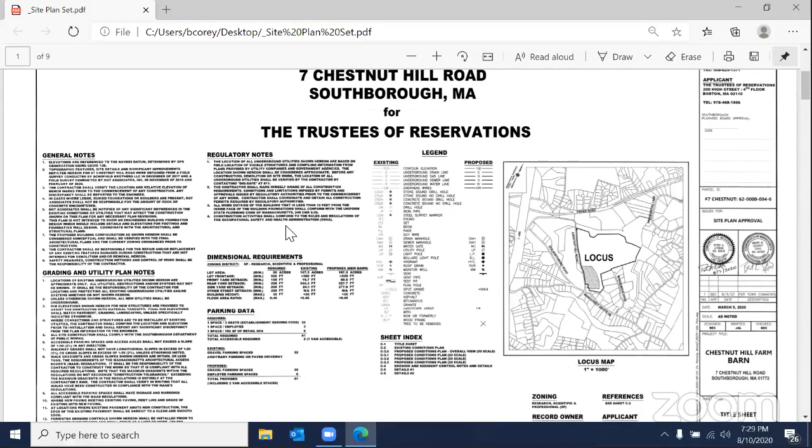All right, scrolling down through the existing conditions. So here was the overall site, move those off to the side. So you can see that we have the limit of work around the north parking area, we've got the limit of work around the parking lot closest to the barn. We also circled the proposed sewage disposal system coming out into this driveway area.

There is a limit of work associated with these three parallel parking spaces, but it's not really part of the earth disturbance because all we're doing is painting some white lines on existing pavement, so that's not included in the area of disturbance. Otherwise, the rest of the limit of work is included. Scroll down.

So this is the parking lot that's closest to the proposed barn. We accentuated a little bit of what's going on with the Chestnut Hill roadway coming into the gravel parking lot. Essentially, we just want to create a small berm there to prevent stormwater runoff from coming across the parking lot.

We also moved a sign that was discussed in the review letter. The sign indicating the handicapped aisle space was right in the middle of the aisle. It happens to be 9.5 feet wide, but we still moved it back. So that sign, the accessible aisle sign, has been moved back.

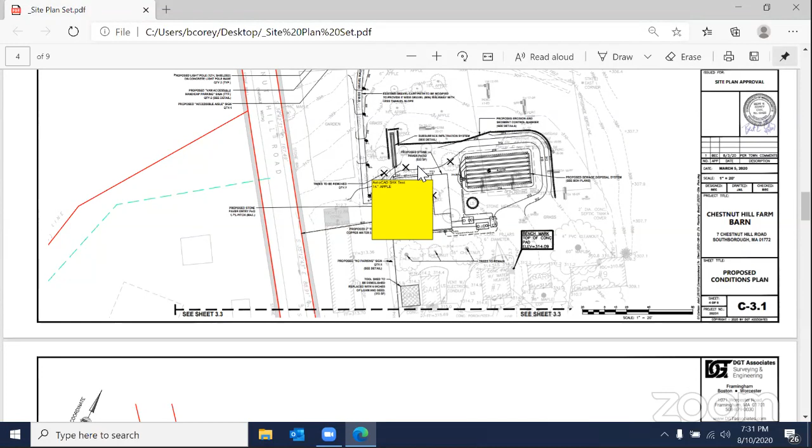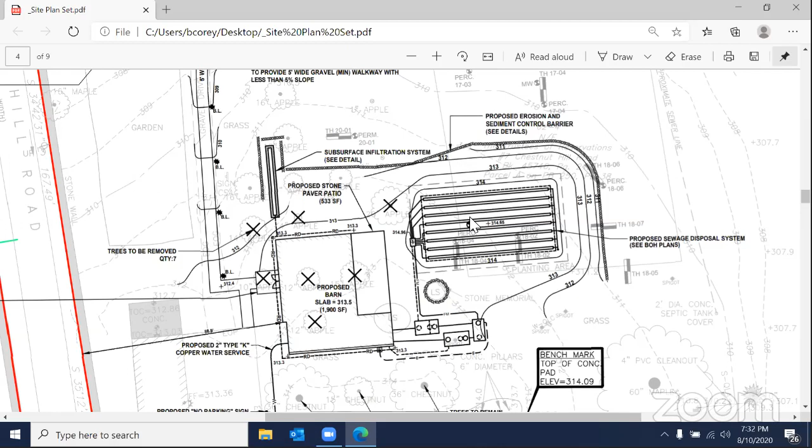We also added to the plans, as came up in discussion at the last hearing, to show which trees were being removed. Let me zoom in a little bit. As part of this, they have an existing apple orchard there today. With the proposed construction of the barn as well as the soil absorption system, we're proposing to remove 7 trees. This is the largest of the apples - a 20-inch apple, a 14-inch, a 12-inch, a 15-inch, another 12-inch, and a 10-inch, all apple trees.

There's some large chestnuts along this side that are to remain, and they're to essentially be protected.

We also added a no parking sign in response to the fire department's review letter.

Moving on to the next one, on the north parking area, we're really not going to do too much with any of the pavement up in this area - just trying to add additional gravel. You can see the existing edge of gravel doesn't really line up too well with where our proposed parking is. We could try to shift the parking back over to where it was, however it doesn't give us room for this wet swale we're proposing for stormwater management. So by pulling the driveway off of the wall a little bit, we had to shift the driveway over, again just to line up with the dimensional standards.

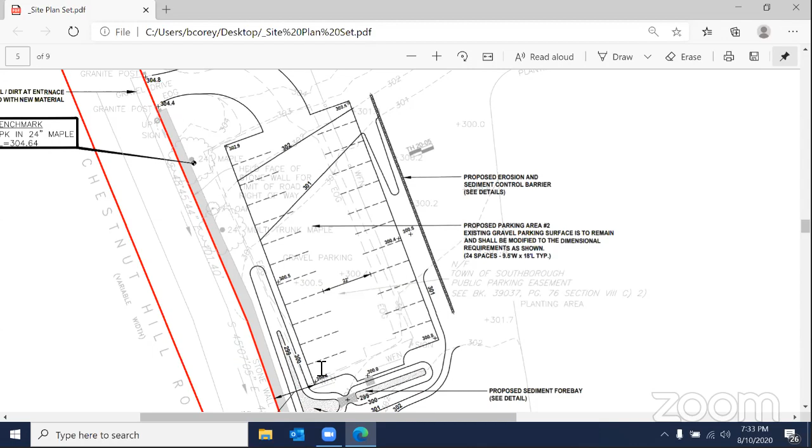I also added this contour here just so it's easier to understand what's going on with the grading in here. It's a simple 301 that carries through this parking lot area, and then there's a low spot, so in case this water quality swale ever overflows, it would pond up as it does today, and then it would continue out in this general direction as it does today. I just wanted to highlight that.

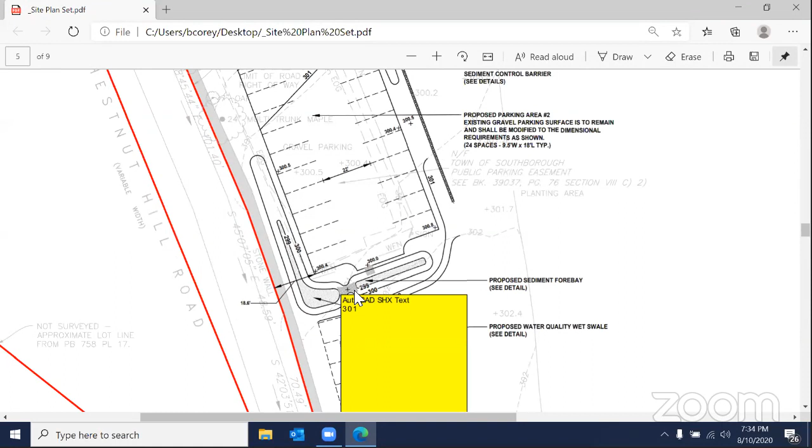And I also increased the size of the sediment forebay, doubled it in size. I just saw an error in the calculation, so I made the adjustment on that.

Going forward, we also added a Chestnut Hill address sign. Essentially, the fire department wanted to have some kind of address sign out in the front, so that'll be a sign that says number 7 and number 9, Chestnut Hill.

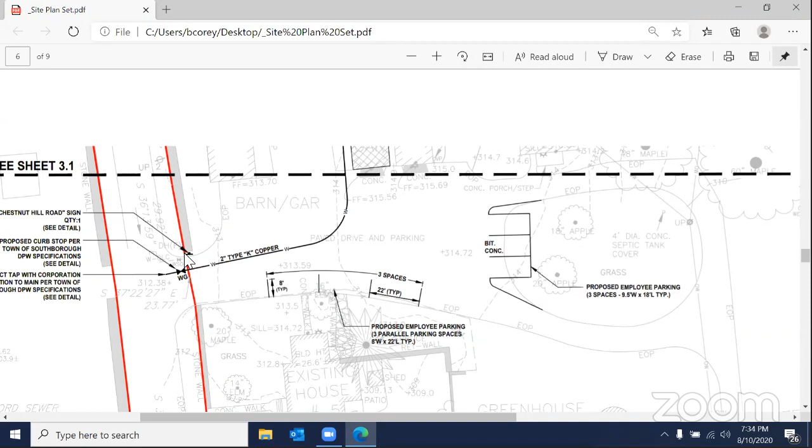And going on here, there was some indication of alternate parking that was removed from the plan. Those are essentially the changes to the plans.

Very good. Any other information that you wanted to share, or should I open it up to the board and the public?

Well, we also updated, as part of the review letter from Fuss and O'Neill, I think we compiled quite a bit of data, exhibit plans, as well as updating the stormwater report too. Haven't seen their response to our response, but there was quite a bit of information that was forwarded on to everybody. I just want to point out that...

First question I had, primarily because it's a pretty important one - did you work out the lid threshold with Fuss and O'Neill? I'm assuming the answer is that a lid is not required.

I can't answer that because I haven't seen their response, or Amy's response back to our response. We did communicate in the very beginning, then I was on vacation, but I tried her a couple of times and did not get her. We did send over the CAD file so she could go in and verify everything. So I'd actually have to read her response back, and what we sent over. I haven't seen that yet, so I can't say anything about it.

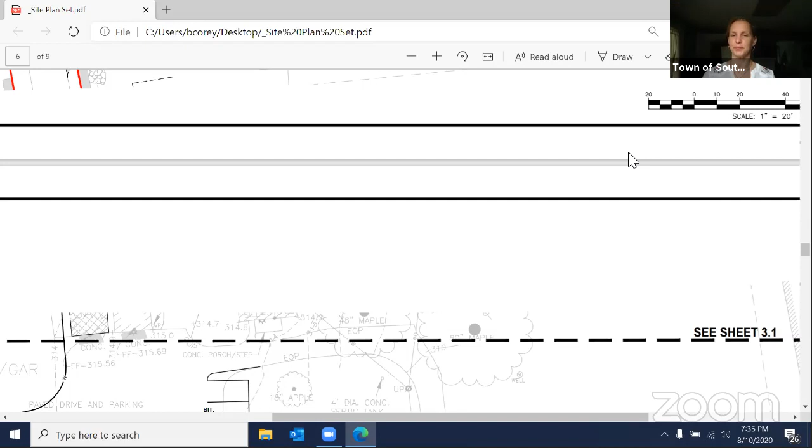Okay, so that'll be to be determined. If I can open the comments before the end of the meeting, maybe I can answer that as well.

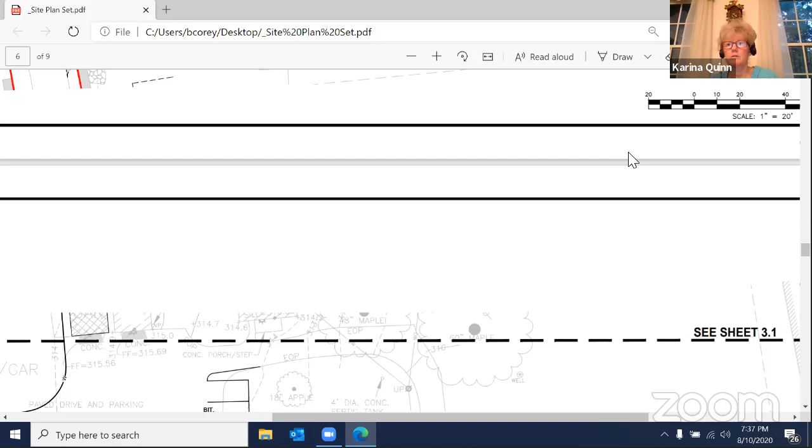Okay, and then also to point out that I believe you submitted a letter from Conservation indicating that the project was approved by the Conservation Commission, indicating that it falls within compliance of the conservation restriction. Yes, that's correct. Bob, okay.

There was a question last meeting on that. Okay. Karina, did you want to go over the discussion relative to handicap? Yes. So there are a couple of things I just wanted to bring up before it goes to the board for questions and to the public. Just give me a second here.

All right, so we need to, once we look at the updated review comments from Fuss and O'Neill, the follow-up review comments, we'll see what they say in regards to the requirement or the need for a special permit for lower impact development. Then, like I just mentioned, the barn is, and the work under this project appears to be compliant with the conservation restriction from conservation.

I believe you have your stormwater management permit back from conservation on July 9th. Yes, that's correct. Okay, I'm just going through my papers here. Hard not being at a desk.

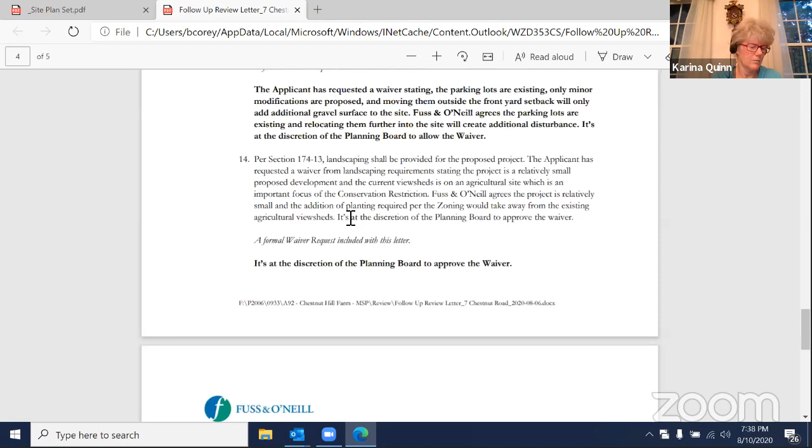Okay. I received some questions regarding the ADA compliance. They were from Bonnie Faniff, who's a resident in Southborough. And she is on the ADA committee, but she wasn't speaking to me from the committee. She was speaking to me as a resident, and she was going to come on this evening as well, but I don't know if her information was working. Her computer was down earlier today, so it had nothing to do with this meeting.

But she had questions. Will there be use of the town parking area for events used at the barn? And that question is because the conservation restriction indicates that 10 of those spaces in the trailhead parking area are explicitly to be used for trailhead parking. And it appears that you may have included those 10 spaces in your parking calculation for the barn. So that was the first question.

Question 2, wheelchairs, walking aids, or anyone that has difficulty with walking should be provided with an accessible route, surface firm and stable, grassy area closely cut to the ground level. No one can enjoy an event if access becomes slippery or muddy. The access appears to be long. Who will maintain it? And is there any consideration on a drop-off area at the front of the building to address the overflow ADA parking needs if needed?

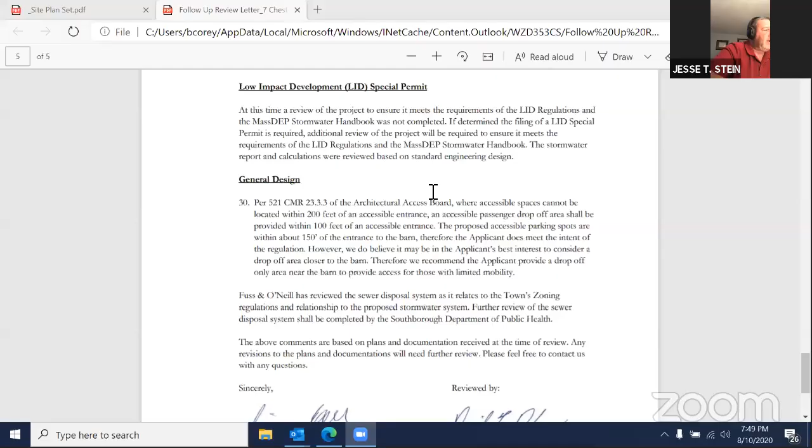Are the parking lots contiguous, or are they separated in some fashion? Well, we're proposing some overflow parking, beyond the gravel parking lots, for some events we would park in the field between the two. But there's an existing farm road that connects those two lots.

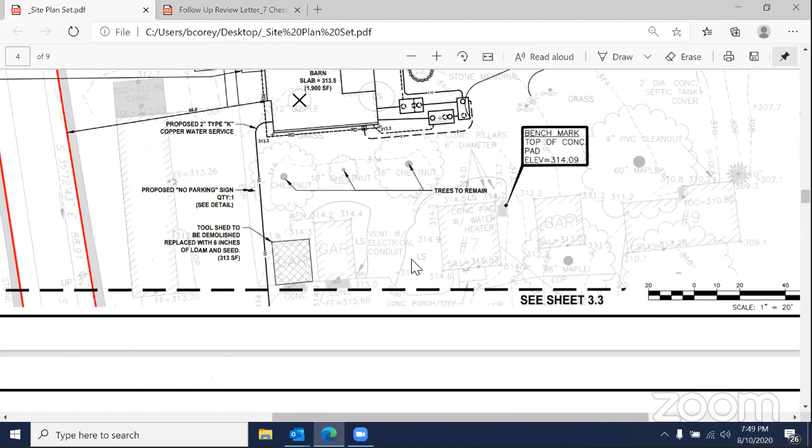Can everyone see the screen? Yeah, I can see it.

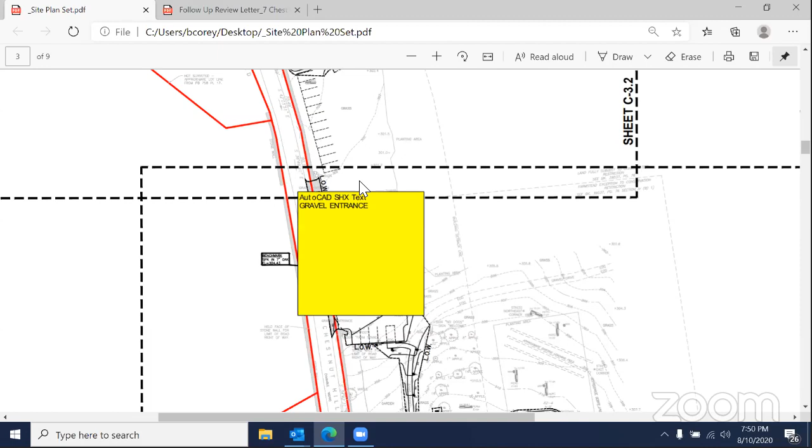This is the smaller of the 2 gravel parking lots, north of the building. Cars come in and also go out the same entrance here. Then the northerly parking lot, this is also an in and an out. There's really no linking this parking area to this parking area. For the overflow grass parking, that would be through this entrance, and that's also an in and an out.

I think it's fair to voice the concern that it's a very narrow road, and there's going to be potential traffic, in my opinion, based on the current plan.

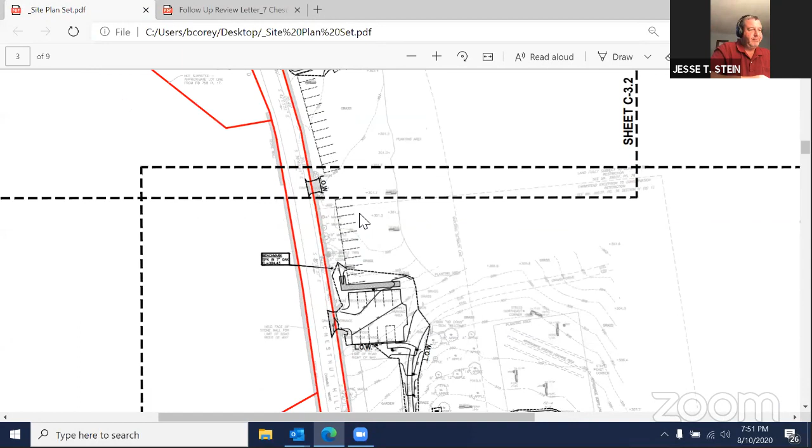Do you have any questions about that or comments? Well, we can certainly look at whether circulation would help with that. We were trying to work within the existing footprint as much as we could to minimize site disturbance.

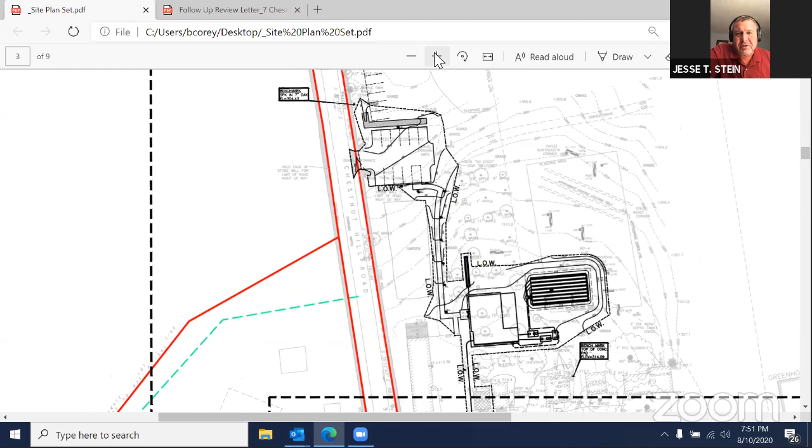So if we could talk about the photometrics for a second. Sure. Actually, on this diagram you have up now on the screen, can you point to exactly where the proposed light poles will be? Can you see my cursor? Yes, I can. Right here and right here.

I got to learn how to shut those text boxes off, they drive me crazy. If you could do it again, please. Let me see if I can zoom in a little bit more for you. Right in this area here is one of the light poles and another light pole over here.

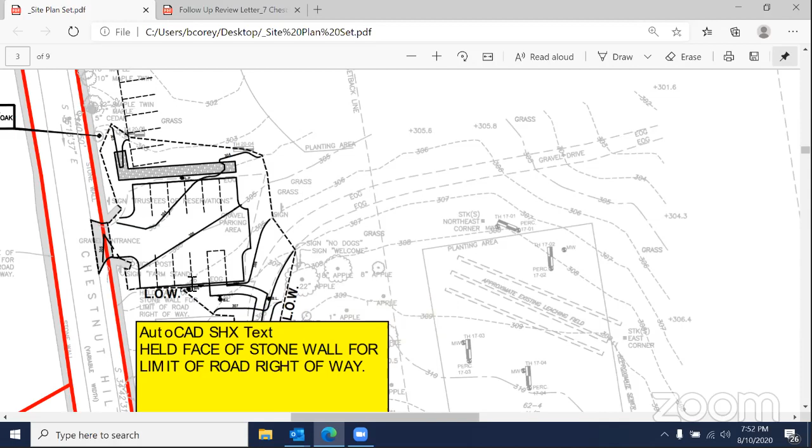Are there any bollards? Are there any existing light poles on the site? There's no existing light poles. We did create an existing light fixture plan. I can share that with you too, if you'd like to see where the existing lights are.

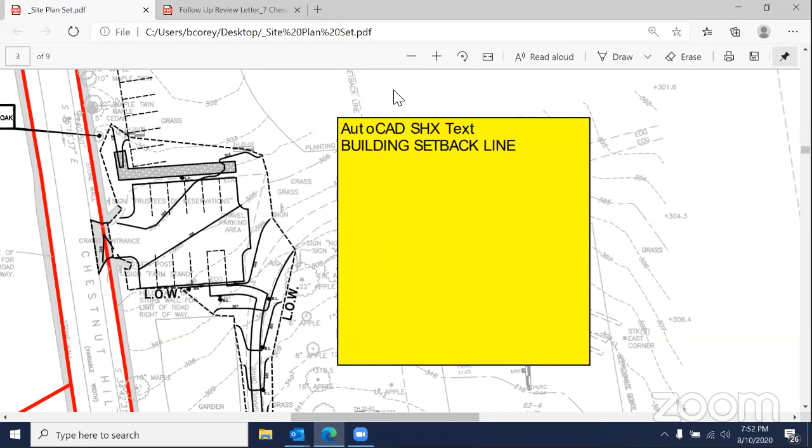Would they be in place or taken down? There are existing light fixtures that are on the buildings themselves. Oh, okay, so in other words, these two light poles will be the sum total of the new photometrics, not in addition to existing photometrics. That's correct.

There's also some small bollards that come up this walkway too, and those are also a part of the photometric plan.

So I'm looking at the photometric plan. If somebody could just explain it to me, there's like blue numbers, green numbers. Maybe just take us through the photometrics, if that's okay. Yeah, I didn't really work on the photometrics, but I'll be glad to take a look at it with you.

This is, oh, that's not the one. Is this the drawing you're looking at? It is, yes, exactly. Great. So these are the two light poles I was pointing out in that parking area, and these are the bollards that go up that walkway.

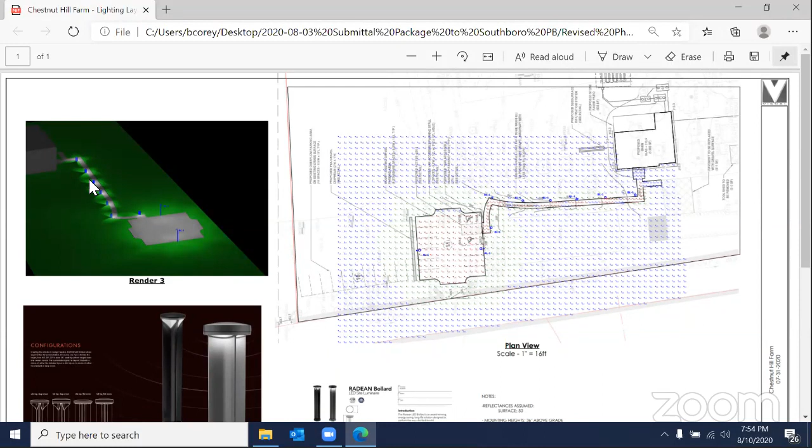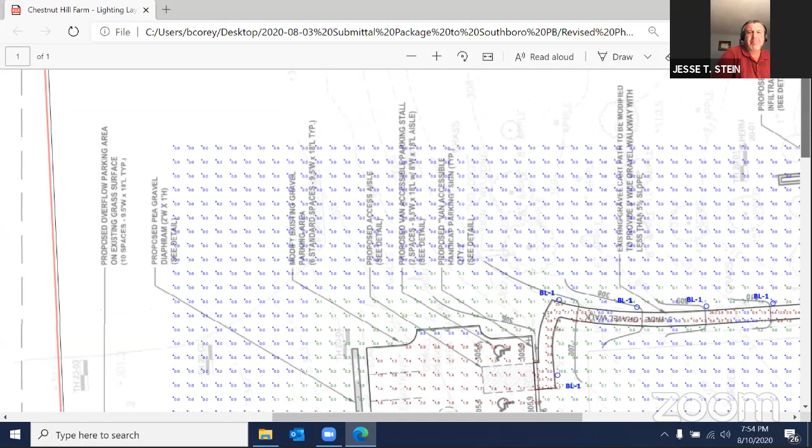Now, how big are those, what did you call them? Bollards. B-O-L-L-A-R-D. Oh, okay. Usually they're like 3 feet high. You see those out front of a lot of commercial buildings, more for pedestrian lighting so that they can walk in through the entrance.

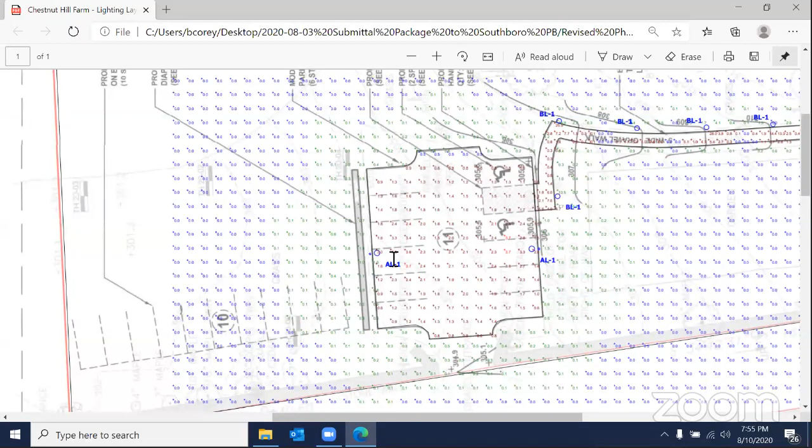So when they do the photometric plans, they know what the light fixtures are, they know the light output from the fixtures, and they generate all of these numbers as foot candles. This is the light being discharged from the actual light fixture. What we try to do is get it as close to 0 at the property line, so there's virtually no light trespass over the property line. Up close to the light fixture, you'll start to see, what is that, 3.5 or 3.6 foot candles.

As you get closer to the property line, now we're back at zeros. I guess the blue ones represent the zeros. The green ones are the 0.1.

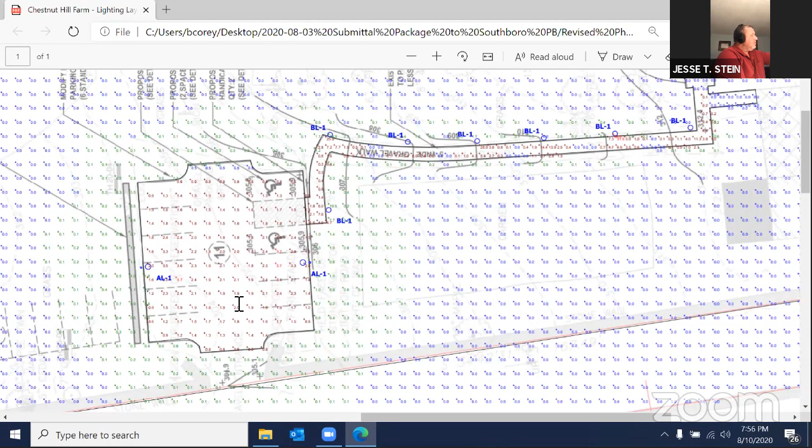Yeah, that's the actual, that's where it's brightest. This is where the red's going to be, obviously underneath the light pole and underneath the light fixture.

As you start to go away from those light fixtures, though, this starts to dim down, and the whole intent is to try to get this down as close to 0 as possible at the property line.

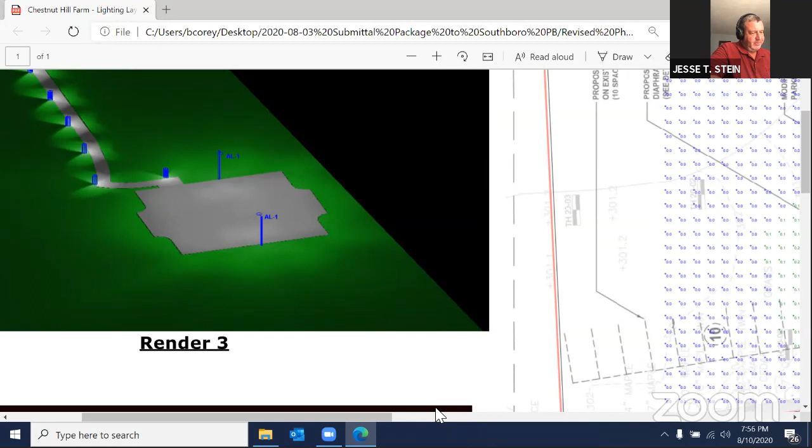So my last question was about the LID. I'm just trying to follow the communication. There was DGT Associates submitted the waiver request.

Fuss and O'Neill said it applies if it's an acre, and you guys said well, the site's less than an acre on August 3rd. So Karina, has Fuss and O'Neill just not had a chance to respond to this August 3rd letter from DGT?

No, I was just looking through that myself. What happened is the original question was Fuss and O'Neill had determined slightly more than an acre. DGT had determined that they were just about under an acre.

Yep, I'm looking at the number here. We're actually, after redoing everything, we're a couple hundred feet under an acre, so we're just under the acre.

Right, so in the interim between the two meetings, DGT, Bert Corey submitted a plan to me and to Fuss and O'Neill with a limit of disturbance and also CAD drawings so that Fuss and O'Neill could look in detail with measurements right in the CAD drawing, along with truck turning radiuses. And as I'm looking at the follow-up letter from Fuss and O'Neill, it appears that it's still in there saying about a waiver.

At this time, a review of the project to ensure it meets the requirements of the LID regulation of Mass DEP have not completed. Determine if the filing of a LID special permit is required. Additional review of the project required.

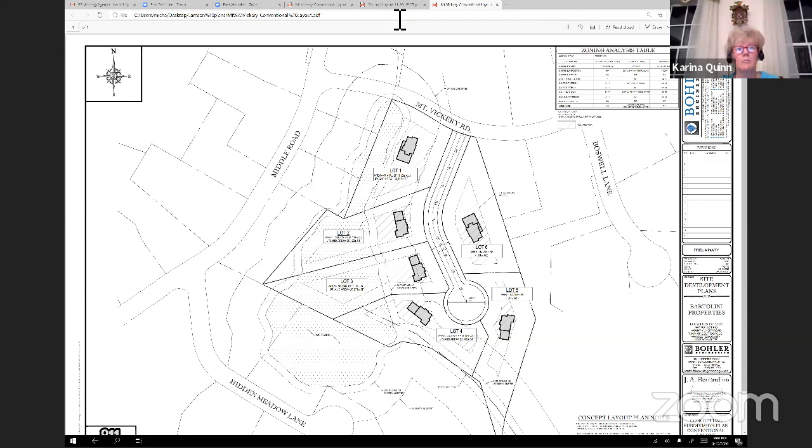The north arrow is going this way, but the road's here. So if you look at the orientation of it - sorry, I'm having an issue. If you go to the flexible layout, yeah it's the same layout. It's the same view, but you rotated the whole drawing 45 or 90 degrees to the right, so it makes it hard to see.

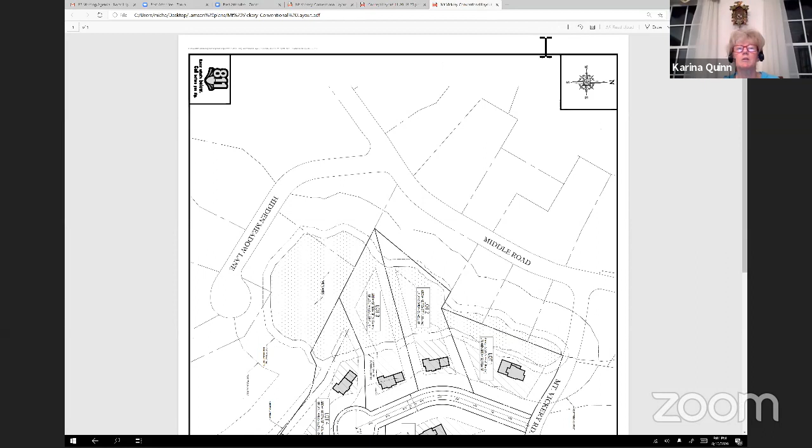Right, so to compare everything, the scale is different also, and it's rotated. I think the north is still the same. Here, I can rotate, hold on one sec. All I'm saying is that between the two plans, it really helps if you can compare apples to apples, same scale, and say Mount Vickery would run across, or Middle Road is across the top. You know what I mean?

Sure, so we can have them amend that. Because if you're looking at it quickly, you have to kind of rotate the plan, especially when you're dealing with PDFs. Gotcha, it just makes it more difficult to compare the two layouts. If they're both oriented the same, you can say, oh look, lot one is a little bit smaller and the flex frontage is a little less, you know.

Okay, I mean I believe the north arrow is the same, it's just the orientation of the plan. Oh, I'm not saying the north arrow is different, I'm saying you just didn't rotate it the same. Correct. Okay, beat that dead horse.

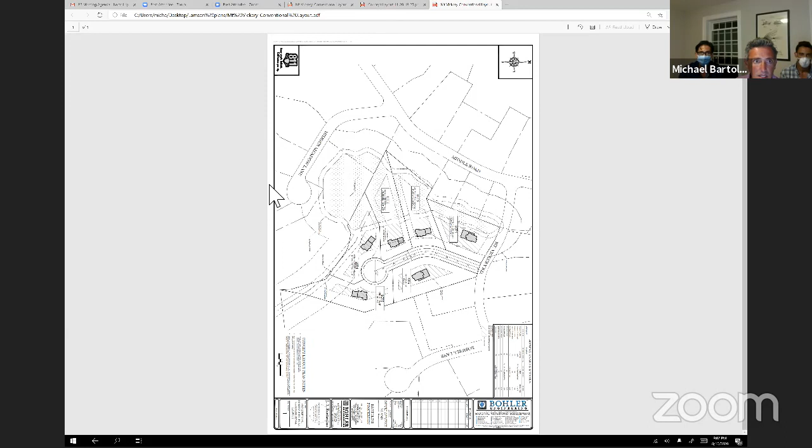But yeah, like I said, we think that shrinking the property and adding more open space does add a great benefit to the neighborhood and the surrounding neighbors. So do you know what percentage open space that is? I believe in the conventional it's 10%, and I believe the flex is 25%. Okay, thank you.

Okay, we'll open it up to the board. Mr. Mills? Yeah, I had a question. The abutters to the proposed new six houses or properties, are there already homes abutting all those lots?

There are some houses here. There is a house here. Those homes, like I showed you before, have been up against a logging facility for the past 20, 30 years. So I think in the back here, one of the neighbors is right there, and he's been staring at logs and chainsaws forever. So yeah, there are homes surrounding it.

I believe there's a home over here off to the left of this pile. There is an intermittent brook in the back here. Once you cross that intermittent brook, there are some homes on Hidden Meadow. And then further off in the distance, you can kind of see some houses on Middle.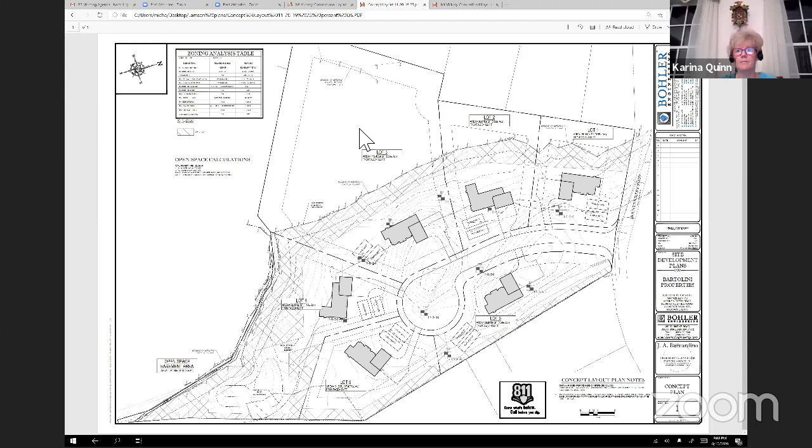I can go if we... Yeah, go ahead, Marty. Yeah, so Michael and team, nice to meet you. I wanted to ask, so as I looked at 174-13.2, there are very clearly stated objectives for flexible development. And I heard you talk about less sprawl, but there are 9 clear objectives, and I'd love for you to just talk through those.

I can actually share my screen if you stop sharing. Yeah, hold on.

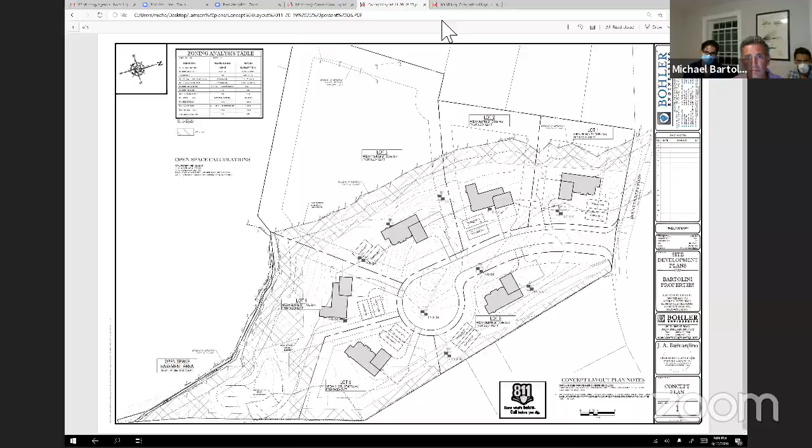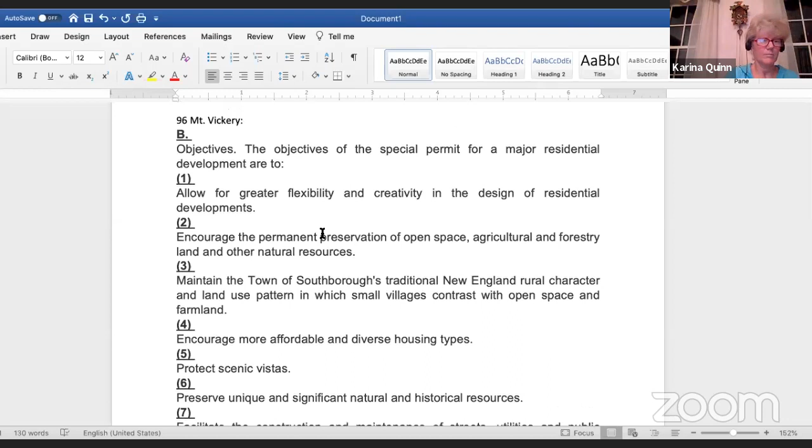So I just copied it and pasted it from town code onto my Word document, but I would love to understand, so there's kind of 9 of these things, and I want to make sure the objectives are clear from you as developers, that we try and achieve what the goal of the flexible arrangement is. I don't want to read them through, but I think if you can just read through and comment as you see, just to address each of the 9 points.

Sure, I mean for the first one, it does create quite a bit of flexibility, especially in design.

It allows for a better looking neighborhood. It allows for better placement of utilities. It just gives you a lot more creativity within the project.

The second one, instead of 10% with the conventional, you're at 25% open space, 10% being undisturbed natural.

The third one, instead of the sprawl, I don't know if you've looked at our Leeds Way project compared to other projects. It allows for the flexibility of the houses to be closer to the neighborhood, to the street. Allows the houses to be closer together. Gives it more of a neighborhood feel. Like I live on McNeil Drive, the houses are much closer together. It gives more of a chance to do that.

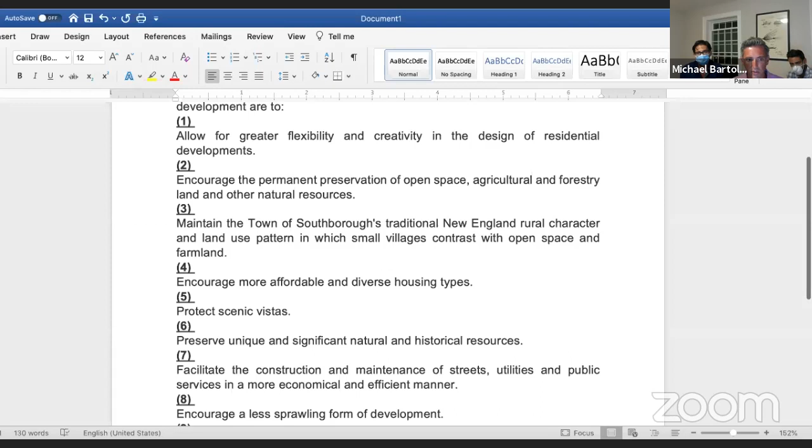Gives a more diverse housing, the affordability. The definition of affordability is different. Are you thinking of having these all at just market pricing? Are you looking to bring in any sort of diverse or affordable housing within these 6 sites?

I'm not looking to do that now. Okay.

The scenic vistas, I will say the wetland area is actually very attractive. It's more like a meadowish type area, so that would be protected. I don't know if there are any unique or significant natural historic resources there, so I don't know about that.

It's a drastically shorter road, and I would say that would help with the maintenance of streets, utilities, and public services. Again, shrinking the project just makes less sprawl. And I don't think we would be putting any passive or recreational facilities there.

Just for clarity on your determination of open space, that doesn't include any of the wetlands, correct? That would be upland area. Sorry, what did you say, a blended area? Upland. Oh, upland.

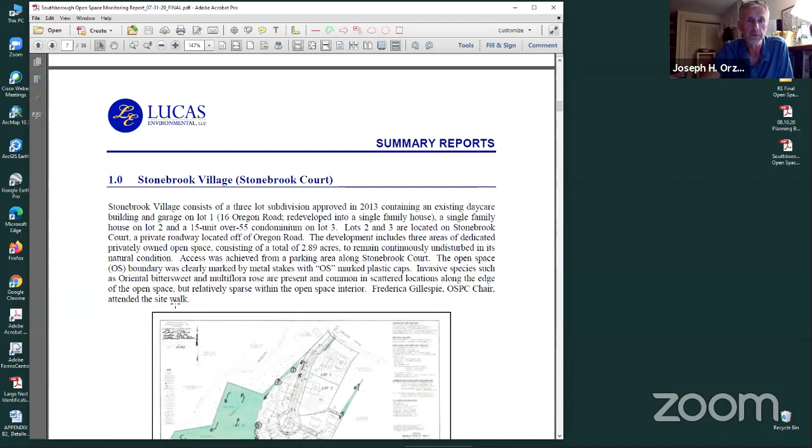As I mentioned, the first site was Stonebrook Village, located at Stonebrook Court. This is a new subdivision. A couple of things were memorable about this site visit. Freddie accompanied me on the site walk and was able to provide a wealth of knowledge. This particular site was not in the database, so it was good having Freddie there.

The boundaries of the site were very well marked. Granted, it was a very recent development, but the use of the iron rods with the caps, spaced every 20 or 30 feet, made it very easy to know exactly where you were in relation to the open space, in contrast to some of the other sites, which we'll get to.

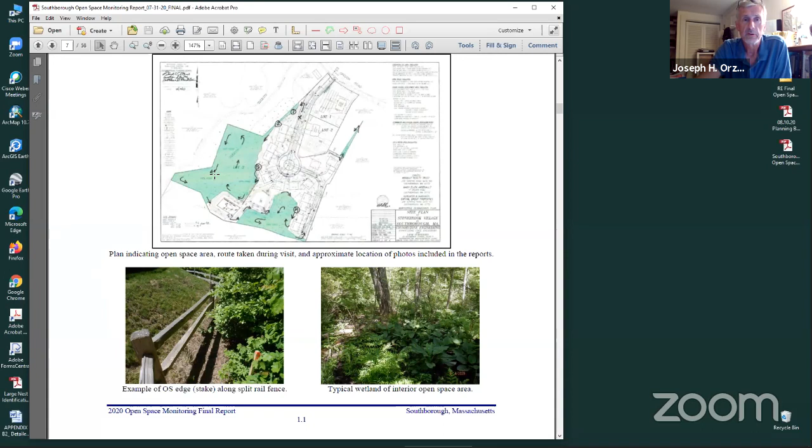In general, the open space is in good shape. There is not a lot of invasive species. There is some invasive species in this section - let me see if I can show it - right along here behind the houses where the numbers 1 and 2, the photos are.

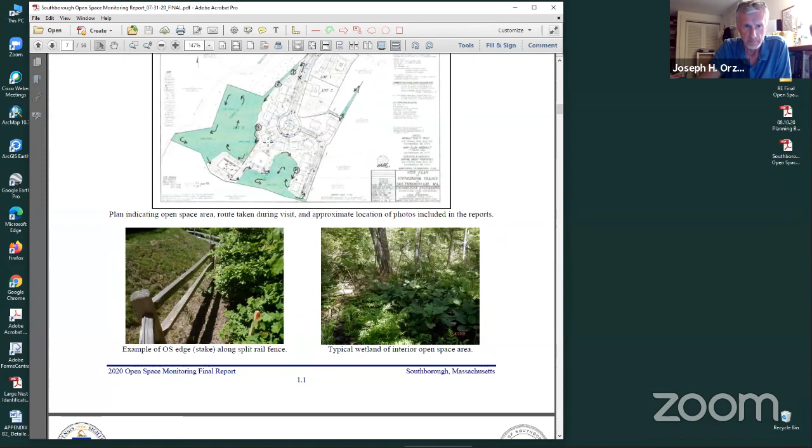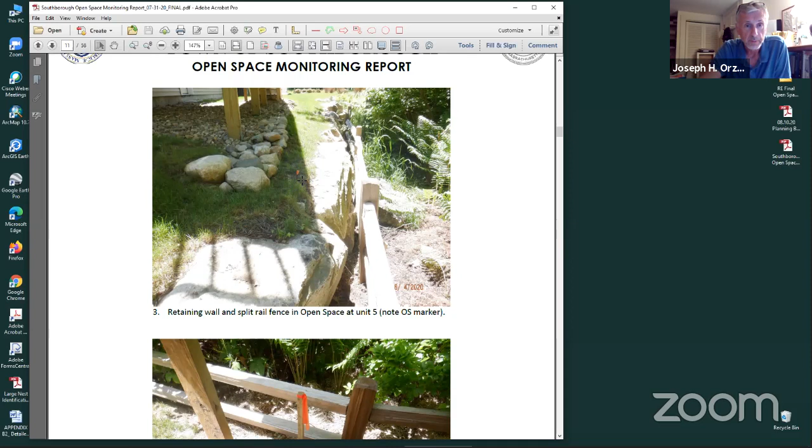Here's one of the boundary markers. Here's a wooden stake, and looking down on the rebar with the cap, and the cap had OS marked on it. Here you can see another one of those markers, but it's up on the stone wall. This is the open space to the right.

So this appears to be a stone wall and a fence which encroached into the open space area. And here is another one here.

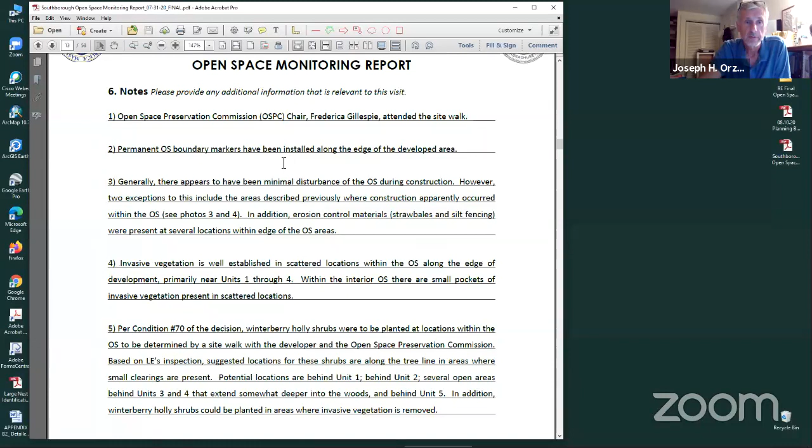As far as some of my notes, as I mentioned, the permanent markers have been installed and were very useful. Minimal disturbance in the OS areas, except for those couple of landscape areas.

And there was also in this one some sediment barriers, some erosion controls, which remained partially buried, both the strawbales and the silt fence within the edge of the open space areas.

Invasive vegetation is in most places minimal, but there are a few spots where I pointed out where it's fairly significant. There were some locations where winterberry holly was to be planted, and we looked at those in the field and made some recommendations on where those could go.

I had Joe add to his notes, whenever there were a list of conditions, I asked them to add, even if it's in summary format, the conditions out of the permits and approvals, so that we could have a quick reference here. This one just happened to have so many because it was Stonebrook Village, and there were an extensive number of conditions there. So there's a couple pages just reiterating the specific open space related conditions. So Joe added those, I just wanted to point that out.

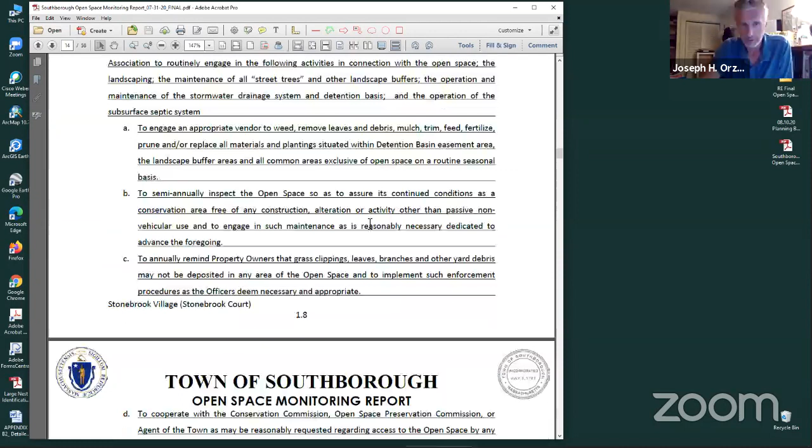Right, that was one of the other changes. We kind of expanded this section to include those conditions that related to the open space. I'll just scroll through those.

Here's the other new section that was added as far as action items. And for this location, we have verified that the deeds include the restrictions.

Upon completion of the project, make sure that the erosion controls are removed from the open space areas. Make sure that all of the rebar markers are installed. I believe there was only one that I recall not being able to find - I think they were pretty much all there. And confirm the condo documents, master deed include the Exhibit A language from the decision.

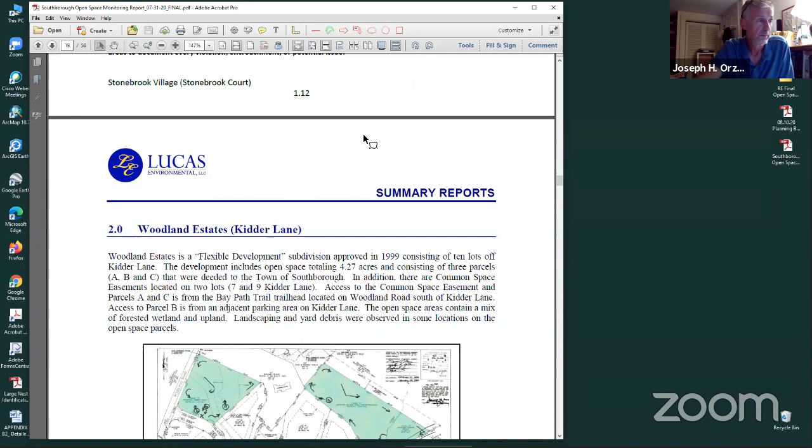So those action items are a culmination of mine and Freddie's, and then if there were suggestions from Lucas, just so that we have something to start tracking of, in one list. So I asked them to add this section.

I think it'll be a good reference if, down the road, this location gets visited again - you can see what's been acted on and if the action items have been followed.

The second site is Woodland Estates at Kidder Lane.

This area has 3 open space parcels, town-owned. Access is through a trail to parcel C and parcel A. And there's a parking area right on Kidder Lane for access to parcel B.

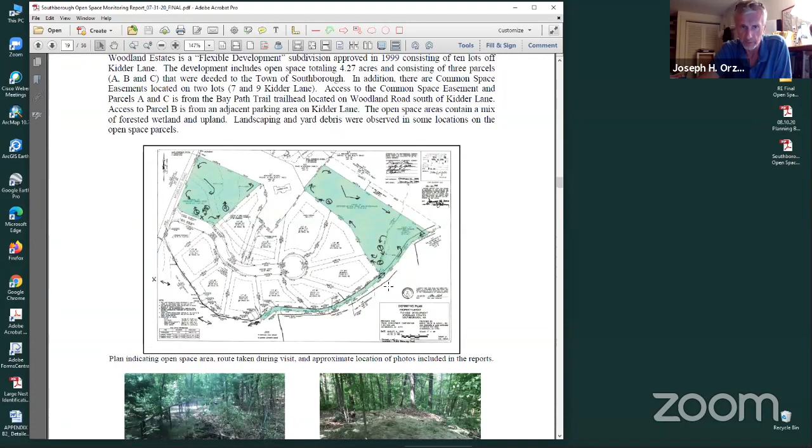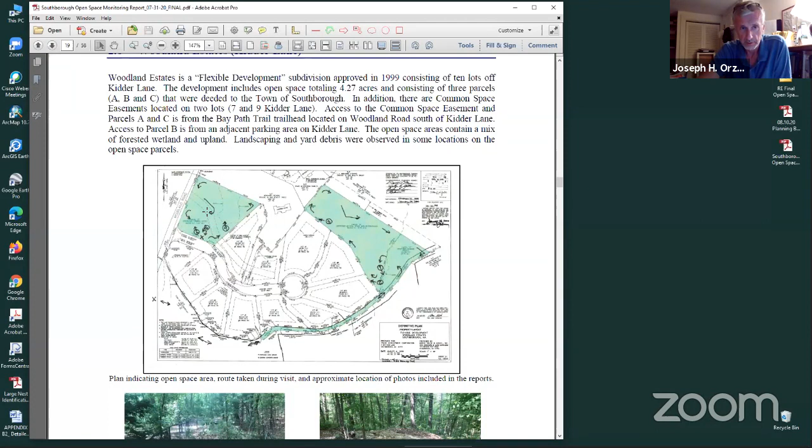In general, parcels A and C were in very good shape. Pretty minimal encroachment. Invasive species were not significant, generally some small patches along the edges, but pretty good in the interior. Parcel B, however, had this whole front corner landscaped, which appeared to be an encroachment, but that may need to be looked into.

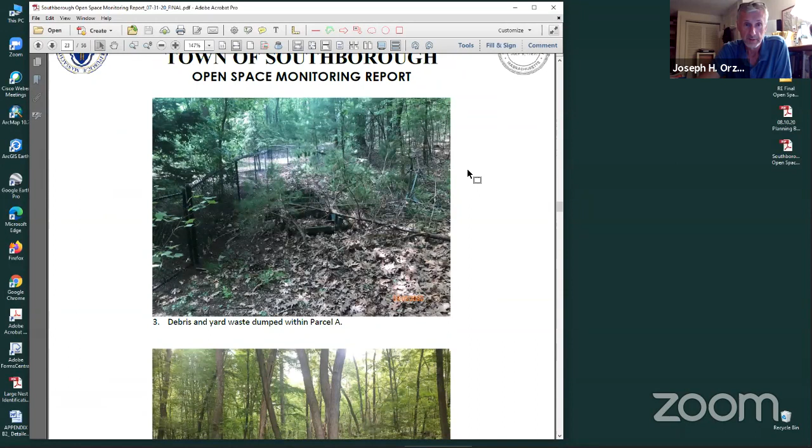There's some photographs here. You can see a typical photograph of the interior portion of the open space. Some yard clippings, yard waste dumped into the edge of the open space. Same thing here. This is a typical parcel B.

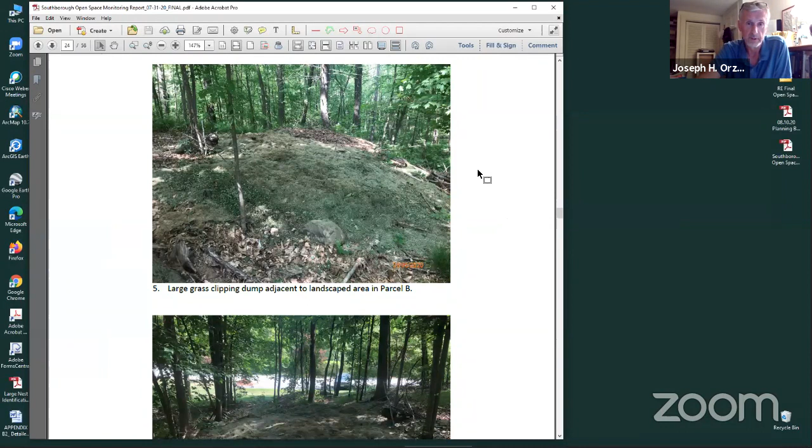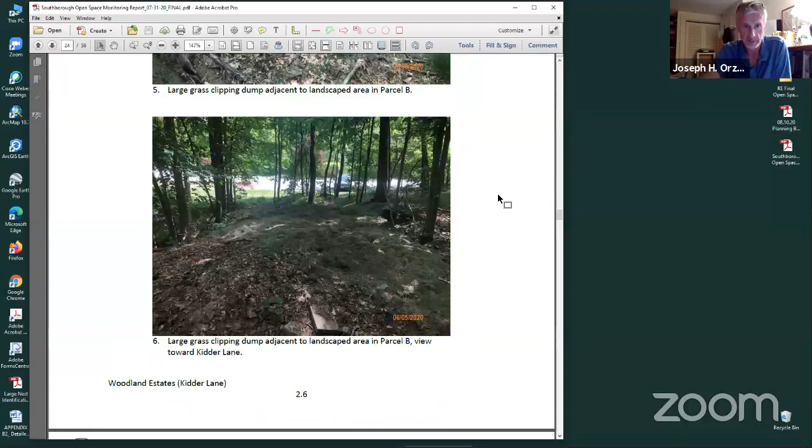And here are some of the pictures of the encroachments on parcel B. This is a huge mound of grass clippings. Apparently they've just been dumping their grass clippings from the mowed area up on this hill. Here it is looking out toward Kidder Lane. And here it is from across Woodland Road.

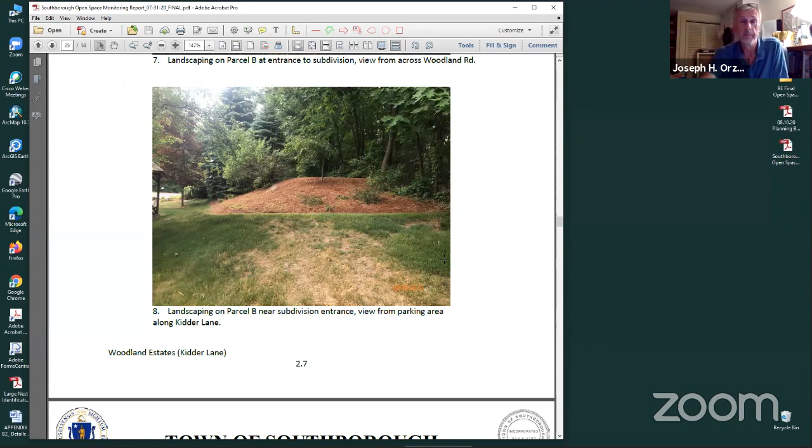I did note that there was a letter stating that access was to have been provided from Kidder Lane to the common open space. I was not able to find that. It doesn't mean it's not there — it just may not be marked sufficiently to know where it is.

Here's a list of the conditions, again, the deed with the open space.

Action items: verify that the entrance at parcel B, verify whether those are encroachments on the open space parcel, and if so, mitigate. Also, there was a section of fence behind number 10 Kidder Lane which, when I was walking through the site, didn't seem to follow the lot line. It may or may not be encroaching — it just depends on where the fence was in relation to the actual lot line, which I couldn't tell for sure.

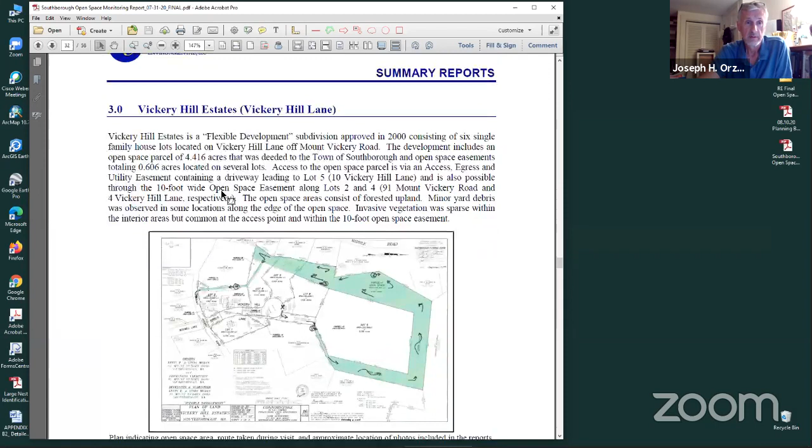Karina, do you have any comments on that site that you wanted to throw in at this point? No, that was pretty clear.

All right, thanks. Third site is Vickery Hill Estates, Vickery Hill Lane.

This is one of the sites that is a good argument for using some kind of bound markers to mark the open space perimeter. This location right here is pretty easy to find. You just go up this driveway to the end of the property line, which is marked, and there's a little parking pull off right here.

However, from there on, it's kind of a guesstimate. It's all wooded, heavily wooded. There are no stone walls located conveniently to let you know where you are. So there's a lot of going up — this is a steep hill, this is the top of the hill up here. There's kind of a lot of going up and down the slope, trying to judge your distance from the house on top of the hill, going around the entire perimeter.

When you get into this area, it was easier because there is a stone wall located here, so it was fairly easy to locate once in this location.

Another argument to be made here is there's a 10-foot wide access easement that comes out here. If these are intended to provide pedestrian access of some kind to the open space, both here and here, those need to be marked in some way, and it should be considered to allow some kind of invasive species management in those areas.

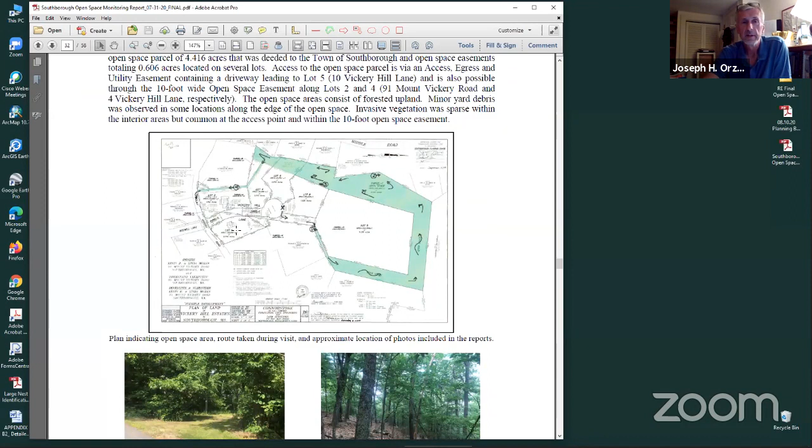The densest areas of invasives on this property were right here at the entrance, and this stretch right in here, which was pretty much impassable — it was so thick with the honeysuckle. So if the intent is to allow some kind of pedestrian access through those, then some kind of management should be considered, along with some marking to make them easier, because they just kind of popped out of the woods at this end without any warning. If I had been approaching from the other direction, it would have been very difficult to find.

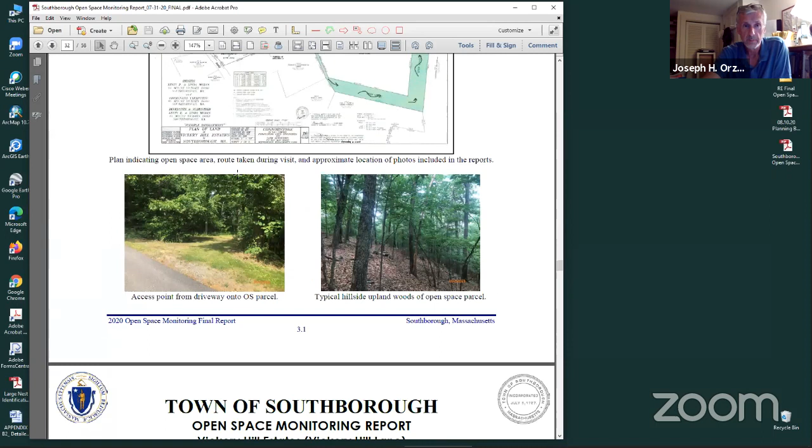You can see the parking area I mentioned right here, and the steepness of the slope.

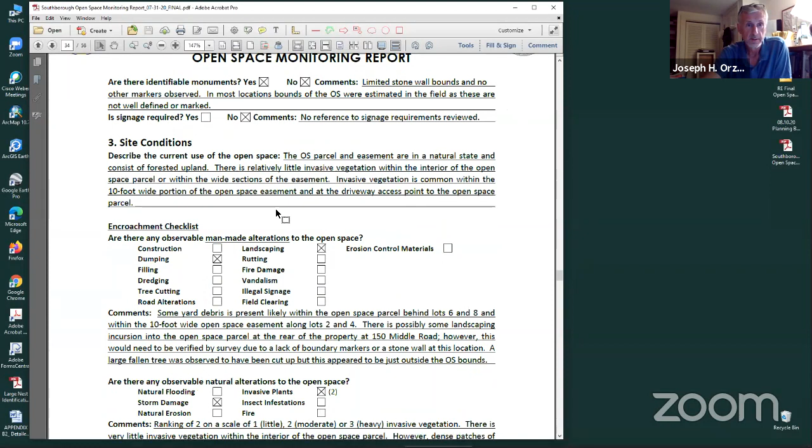There was some storm damage, some large trees, some large blowdowns that look fairly recent on this site, as in one of the other sites, which I'll mention. Here's Oriental Bittersweet right at the entrance.

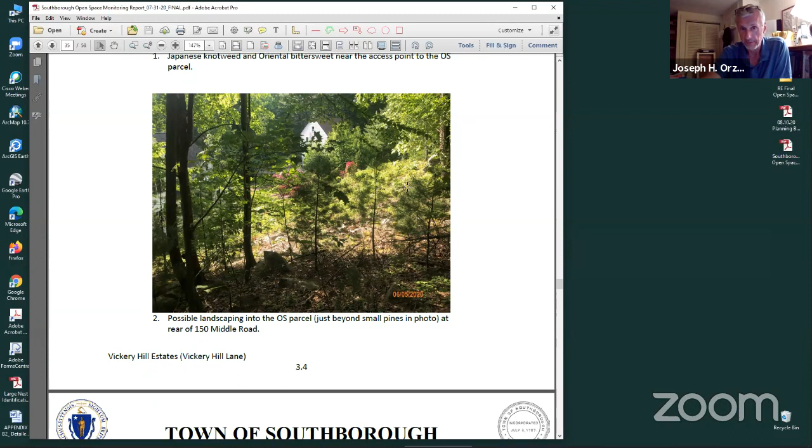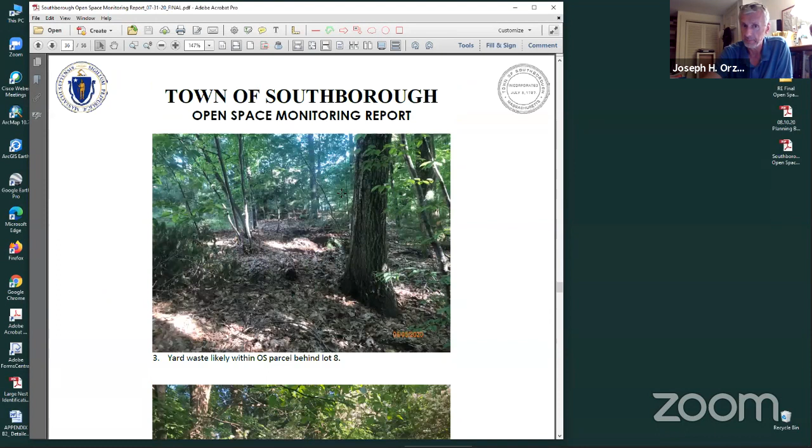This is a possible encroachment right just beyond these small pines. The trees have been cleared, but again, it's difficult to know exactly where the property line is there. Just eyeballing things, it looked like it might be up into the open space.

Typical yard waste along the edges. And this is the 10-foot wide access, which is, like I said, pretty much impenetrable.

Action item is to determine where the town-owned parcel exists, either through the easements, or the access and utility easement, or from a former Curtis property.

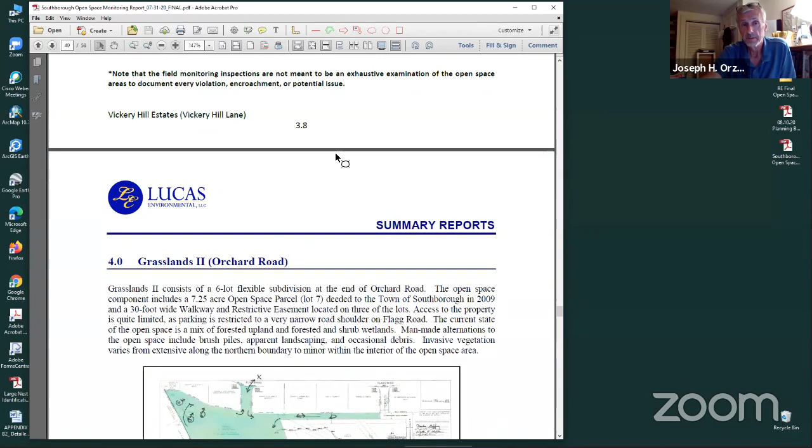Anything to add on that one? No, that's good. It is tough to determine if there aren't markers.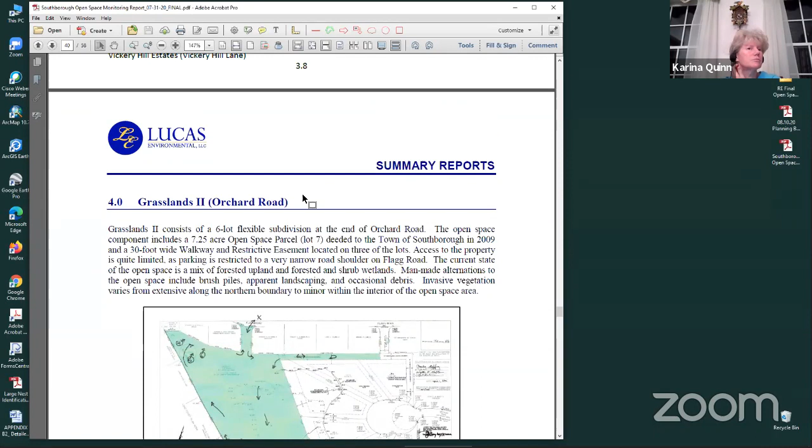So moving forward, like I said, the markers at Stonebrook were great. If all the sites had markings like that, it would make it much easier.

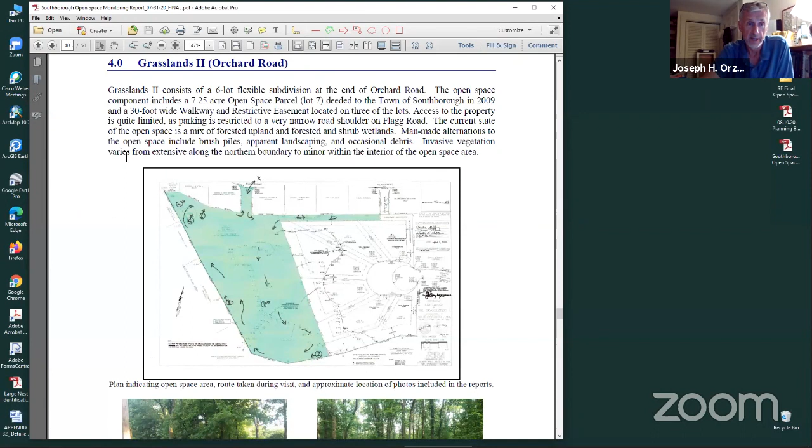The last of the sites was Grasslands 2. This is primarily, or at least a good portion, forested wetland. This edge over here is upland.

Difficulty again on this site is access. I wasn't sure if there was supposed to be access in through this utility easement. I could not see any access in through that way.

There is access here. Again, extremely overgrown with invasive vegetation to the point where you're probably not going to get through it without a machete. I had to actually walk around onto the back of this property to get around the invasives.

Once you get into the interior, it's very nice forested wetland. The northern edge here and in through here and this path are where the invasives are concentrated.

They are very heavy in that section. In this area, very few invasives. There's a potential vernal pool, a mapped potential vernal pool, right in this area.

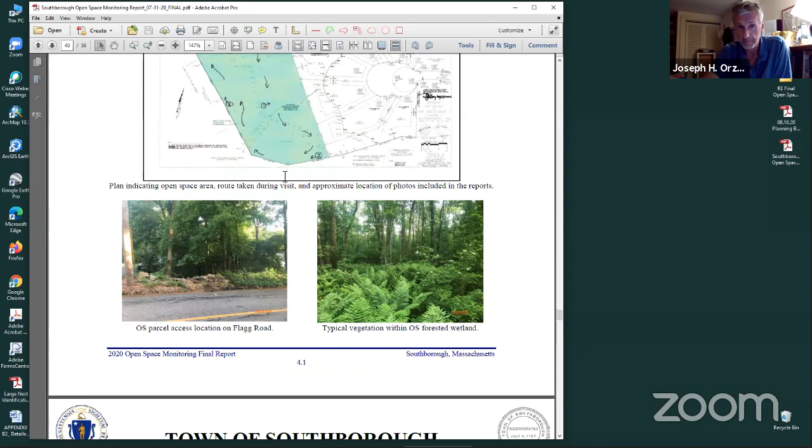And if I was a betting person, I would bet that that is in fact a certifiable vernal pool. It looks like it had all the right ingredients to function as vernal pool habitat.

One of the other access difficulties on this site is where to park. If you want to get in here, this is a very narrow, windy road with very narrow shoulders. I was able to find a spot, squeeze in on the shoulder, but I wouldn't recommend anyone actually park there.

Let's see. This site also had some significant storm damage, some large trees blown down.

Here's a photo of the potential vernal pool, part of it. It actually expands out at the back of the photo.

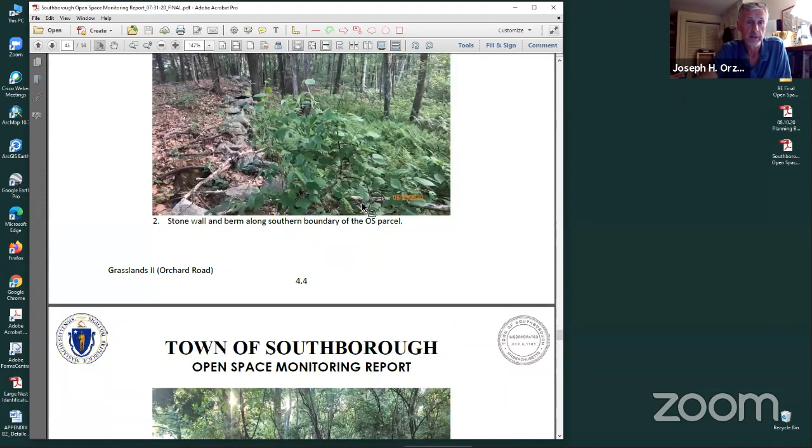There were stone walls along most of the property bounds on this site, so it did make it easier to find my location, except in one spot, which I will point out when we get to the next map.

As you can see, there's some thick honeysuckle. This is along the northern property line, and bittersweet. That's pretty typical along the northern property line.

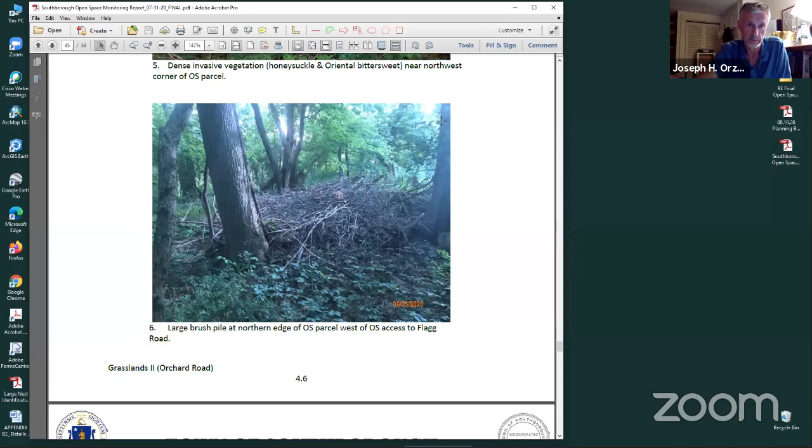And again, clumps of yard tree clippings and grass clippings that are along the edges of the developed properties.

This portion right here was difficult to locate on. There again, it looked like there might have been a couple of stone walls in this location, and which one was actually the property line wasn't real clear.

And when I got to this spot right here, the wooded area and what appeared to be the open space swath that I was walking on just sort of disappeared into landscaped yards.

So this area right in here might need to be looked at a little more closely to see if that's been encroached upon by landscaping. But again, it was a little bit tough in this area to know exactly where I was located, but it was certainly this general location.

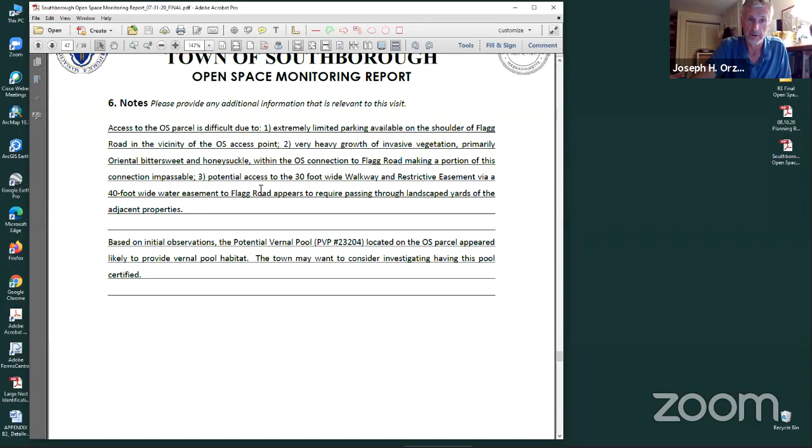As I mentioned, access is a big issue at this open space parcel due to limited parking and the heavy invasive vegetation trying to get in.

I also recommended that the commission or the board may want to consider investigating having the vernal pool certified. The Conservation Commission could certainly look into that.

And one action item regarding Lot 7, deeding Lot 7 to the care and custody of the Conservation Commission.

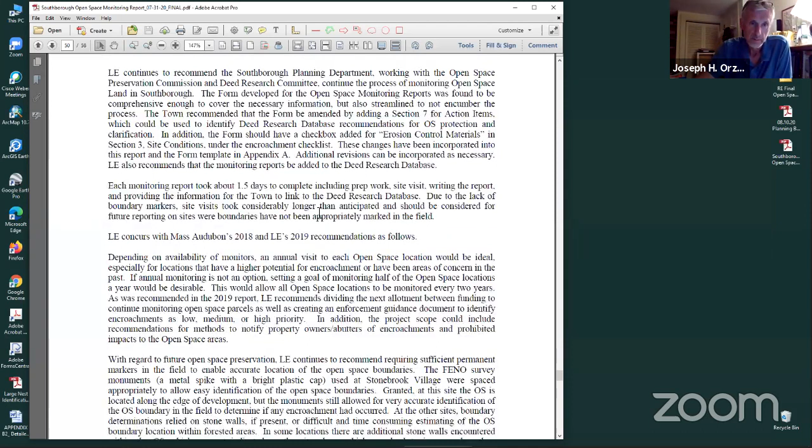Overall recommendations: the town had recommended, as I had mentioned, that the form be amended by adding section 7, which we did, and by adding a checkbox for erosion control materials encroaching into the open space, which was also done.

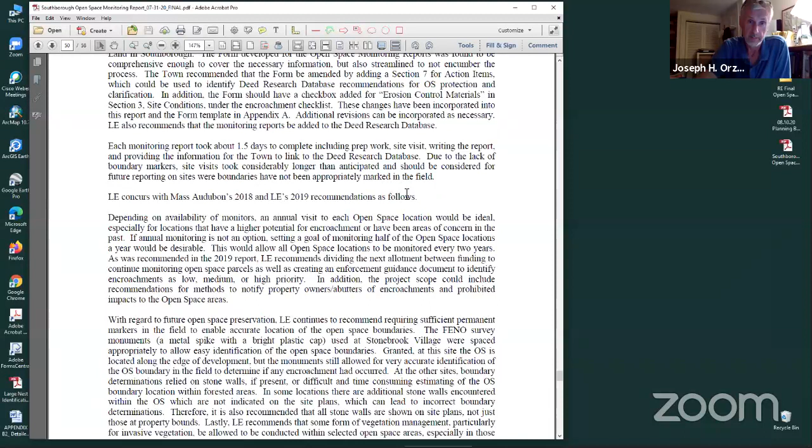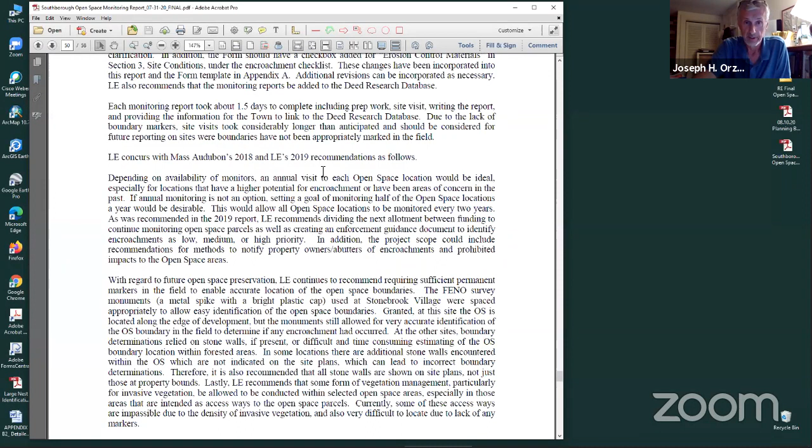We continue to recommend, as we did last year, that moving forward, boundary markers be required to mark the bounds of the open space to make them easier to find in the field.

We also would recommend that going forward, the project scope might be expanded to include recommendations for methods to notify property owners and abutters regarding encroachments and prohibited impacts, possibly some kind of a brochure or email notification program for people who border on open space.

With regard to the future open space, we continue to recommend requiring sufficient FENO markers, as I had mentioned. Also would recommend that when plans are submitted, all the stone walls within the open space are indicated in some way. It just makes navigating those areas much clearer.

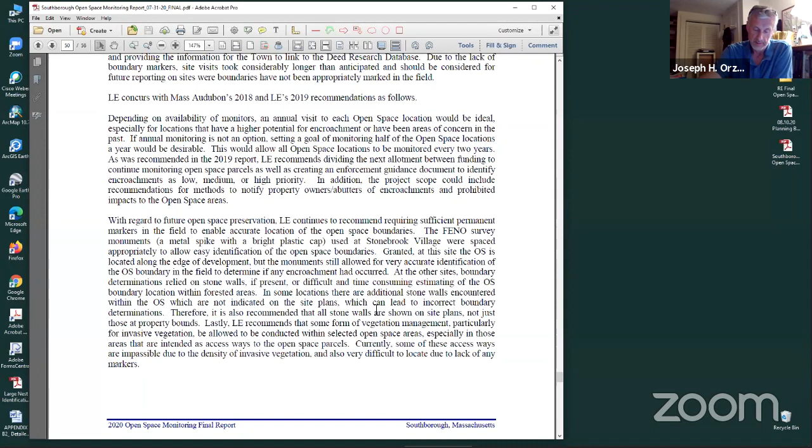And as I had mentioned before, would recommend that some form of invasive species management be considered, especially in these areas that are meant to be access ways for pedestrians to get in and out of the open space.

And I think that in a nutshell is it. I'm certainly happy to answer any questions that you have.

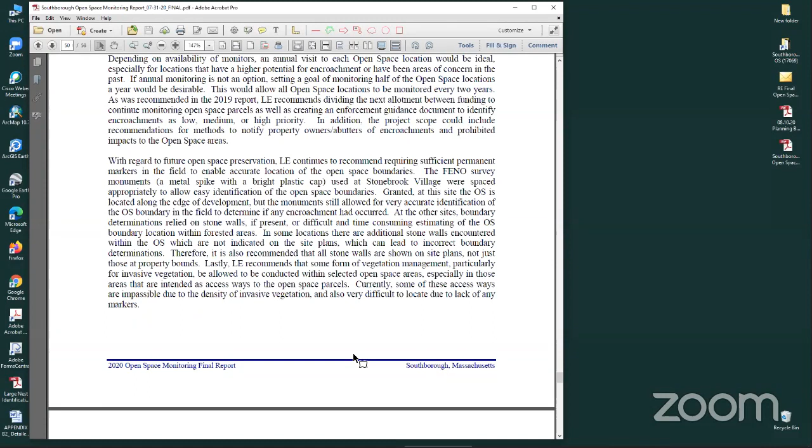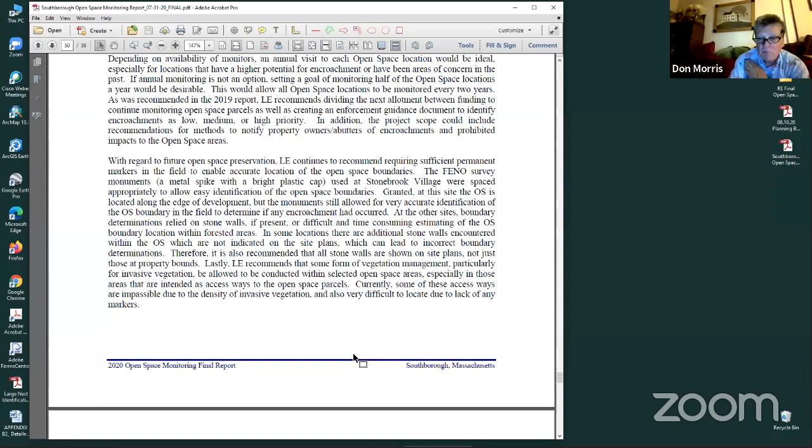I appreciate the extra effort you put in too. I know I asked you for a little bit of out-of-scope work, and you guys graciously provided that. So thank you. Aim to please.